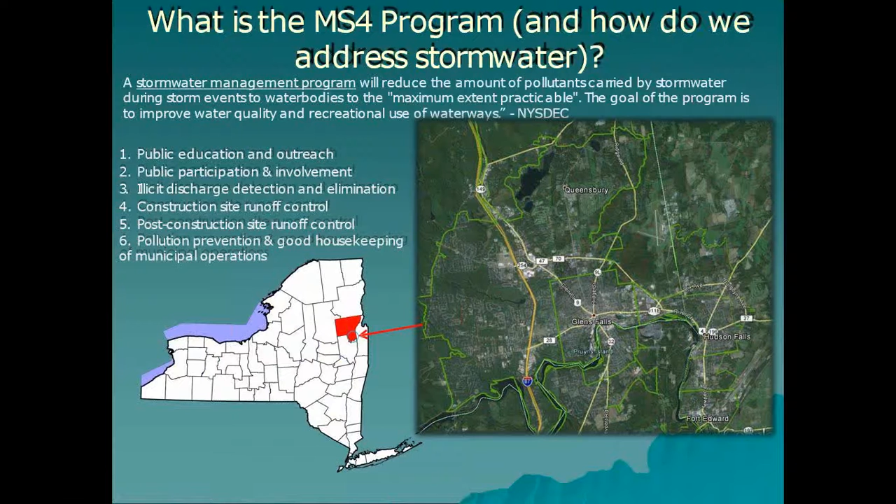We are field-oriented and do a lot of assistance work for municipalities. For example, stormwater conveyance mapping, where we're out there using our GPS units and GIS to develop stormwater drainage maps. Many people don't realize that municipalities don't have these down on paper, or if they do, they aren't digital.

You can see some of the activities we participate in and get the public involved with, such as storm drain markers. That's the image of the 5 people in the top right—a local consulting firm that took their lunchtime and went out to do storm drain marking.

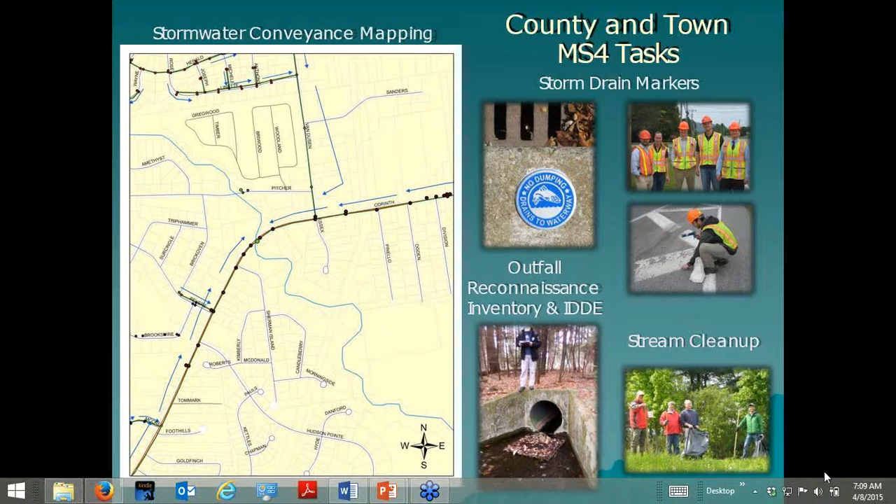We do outfall reconnaissance inventory and illicit discharge detection. If we find something, we pass that along to the agency responsible, either the town of Queensbury Planning Department or the Warren County Department of Public Works, and they deal with things quite differently. And stream cleanups, which most communities participate in—it's a great way of getting the public involved.

This is some of the sampling we do. Here's an example from the town of Queensbury, where we work with their planning department many hours out of the week. The data we collect for the community is available for public viewing on the town of Queensbury's website. They have a GIS coordinator who's fantastic, and we provide the data sheets and locations from our GPS, which they sync up on their real-time server. People can go in there, find a drop inlet or an outfall, click on it, and see what has been sampled.

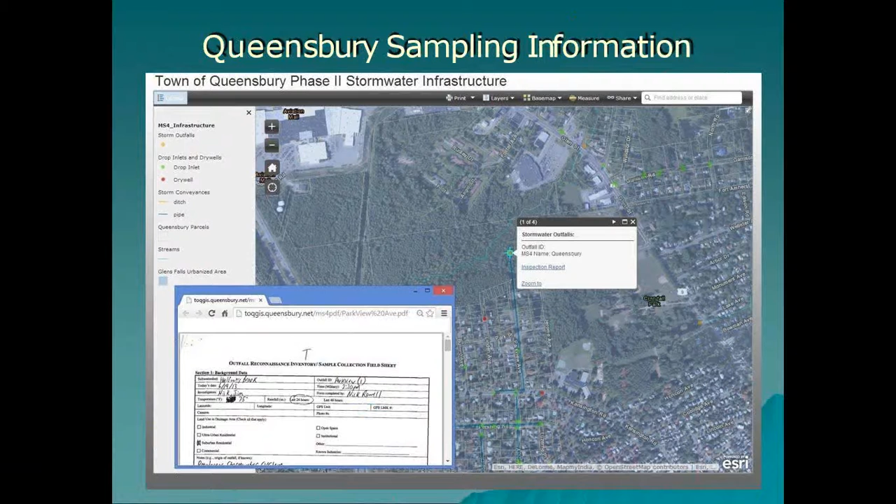So this has been a very valuable tool in getting information to the public, as well as educating the authorities in Queensbury.

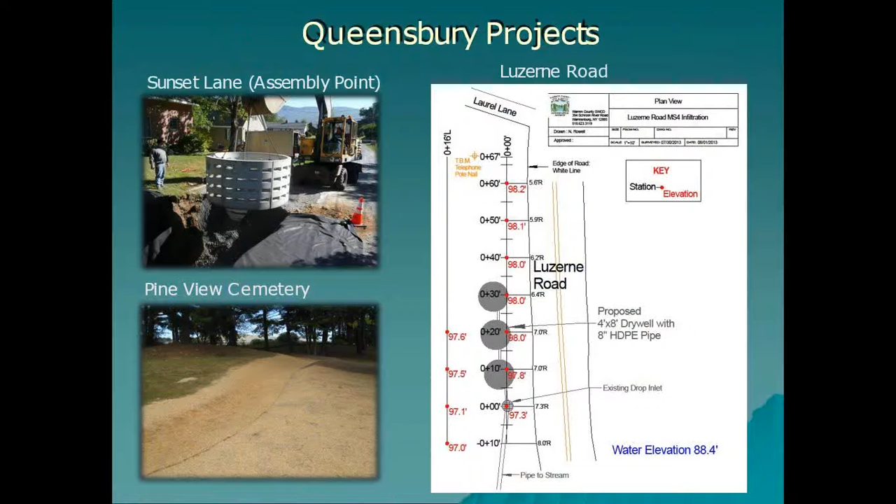Some of the projects the communities work on: in the town of Queensbury, Sunset Lane is a developed area along Lake George, one of our surface water drinking water lakes. Lake George is recognized across the country as one of the best lakes to have in your area, and that comes with a lot of responsibility. It's a drinking water surface, and a couple of communities draw right out of there, so it's important that we assist them in maintaining high levels of water quality.

Infiltration systems, conveyances, vegetation—those are all things we look at to try to disconnect stormwater where possible. Many of our soils are hydrologic soil group A or B, so infiltration is completely plausible. We're also looking at the town of Queensbury's Glen Lake watershed, disconnecting stormwater, getting it into the ground, and treating it with vegetative treatments.

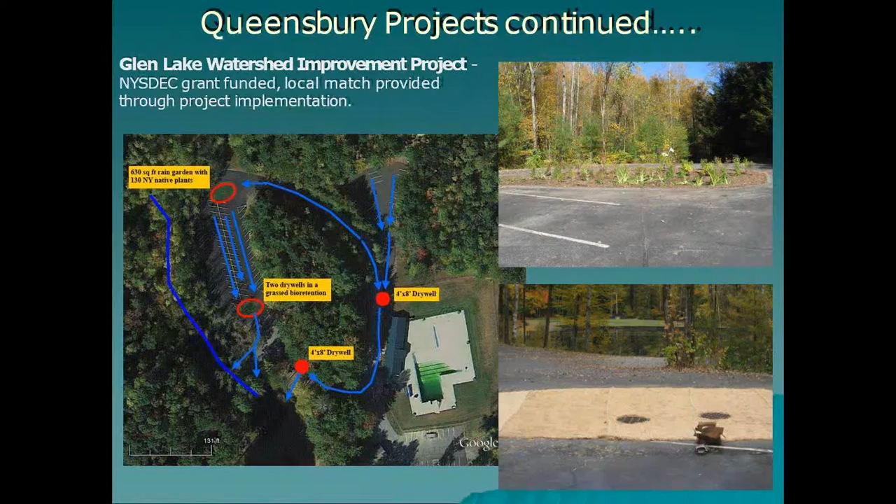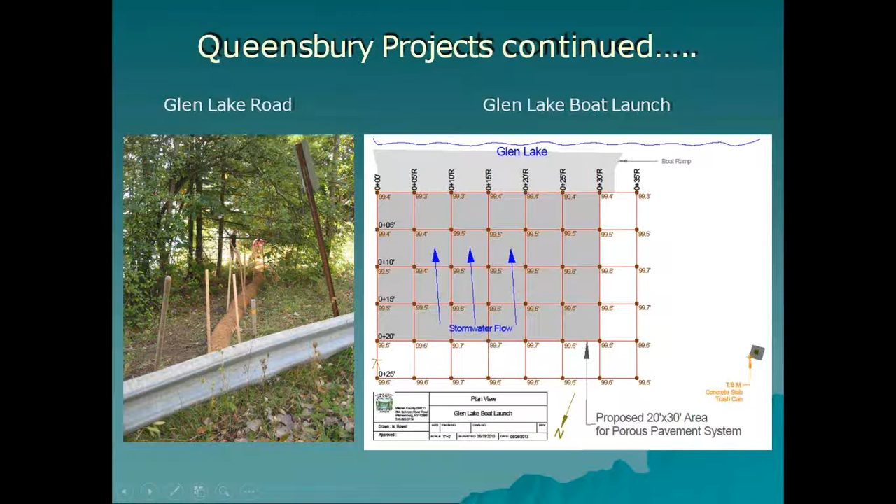This is one of the things we were able to do around Glen Lake. This is a public boat launch on Glen Lake, used any morning you go by there—the parking lot is full of kayakers, canoeists, or car-top boats. We have problems with water coming down off of Glen Lake Road in the background. The town has a dry well up there to infiltrate what it can, but water would still find its way around that, come down across this material, which is item 4 stone dust, and either settle there or continue off-screen and into the lake.

We had some dollars from a New York State Department of Environmental Conservation grant to do some porous pavers there, and we gave it a test run two years ago—I'd say it was 95% successful.

We had one minor issue. We remedied that and then offered up some more money to do the rest of the parking lot. The town was thrilled. The people are excited because in an MS4 community, it's not just water quality, it's also water quantity.

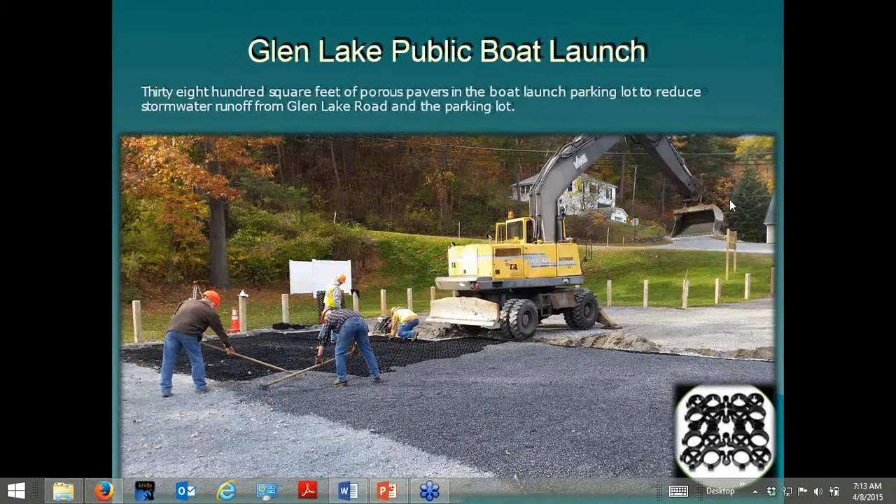So if we can get the water off of the parking lot, get it moving away, and separate it from any potential pet waste and bacteria, that's a good thing for us. Warren County Department of Public Works has bought into this as well. It helps when you have funds available that they can utilize for supplies and materials to do projects, simple projects such as getting out there doing some infiltration systems for water quantity control.

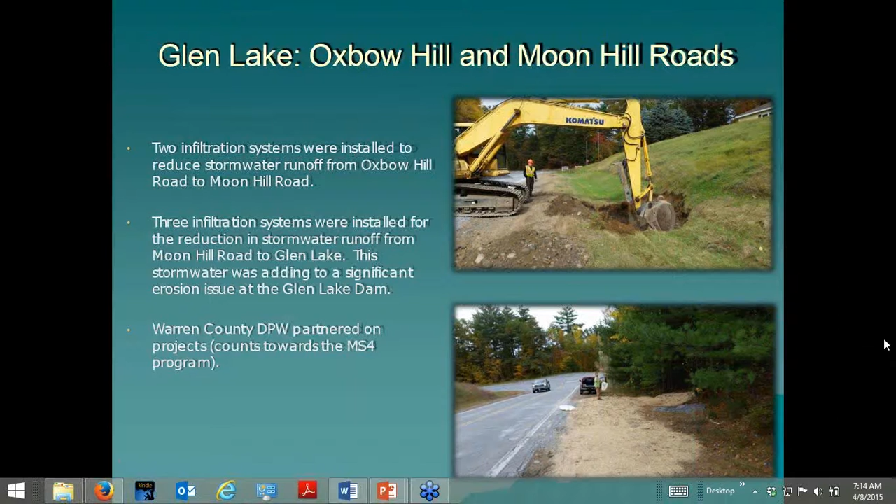This isn't a huge area for non-point source impacts, but it drains down to the lower road you can see in the second image, and it was having an impact on private properties. So disconnecting some of that water volume, treating it, getting it into the ground, and also we're out there with our hydroseeder hand seeding and mulching, getting it out there. So we have a good partnership built up with the DPW and the local town.

Our hydroseeding and power mulching program, if you are getting into urban, suburban stormwater, this is one thing I would strongly encourage you to do. It's very visible and highly effective. You can get rid of basically 90% of the problems with erosion through this type of program.

We have our own hydroseeder and power mulcher, and if we have a grant we are happy to provide the service free of charge to the communities, and that is almost 100% of the time. It has to be water quality improvement related.

As you can see, we have a variety of areas here that we're doing. We have to use, in most of our county, zero phosphorus fertilizers, and the fact is we really don't need a lot of phosphorus, and we use straw rather than hay.

We're very concerned about weed seed in the hay, and even then we try to use hydroseeding as much as possible because we do not live in an agricultural county, and a bale of straw for us is about $11. So hydroseeding is much more effective, cost-effective, and efficient.

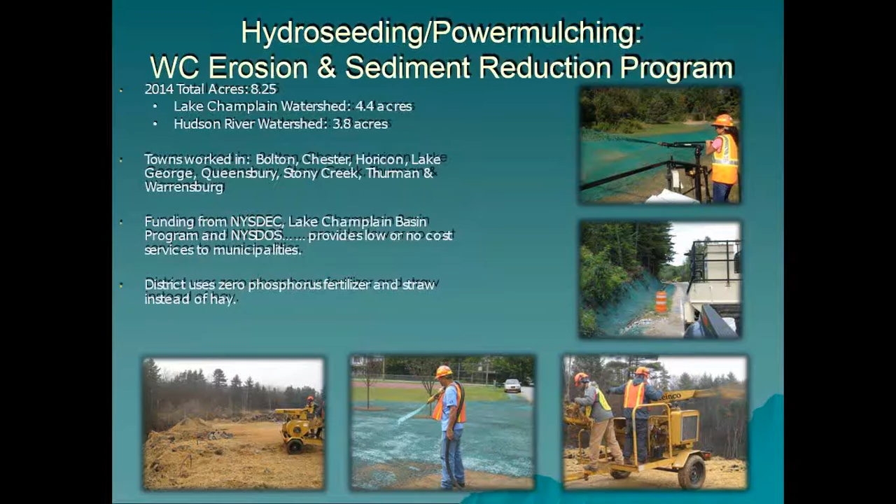And the last thing I'll say is dealing with our communities, we're getting involved in hazard mitigation. I'm also the hazard mitigation coordinator for the county. These are images of some of the problems that we've had.

The one that usually gets the most comment is the top left, where there's a pickup truck. That's actually our office truck, a GMC 1500 series. You can see that is on a road in my town, and the Hudson River is just on the other side of that, and the ice jam comes up and over. That was two years ago. They have to bring in heavy equipment and cut the road open every few years.

But we have our minor landslides. The bottom middle picture is actually a lake that came up during last year's spring snowmelt and rainfall event, and it's level with the parking lot and almost getting to the porta-johns. So we want to try to correct those things.

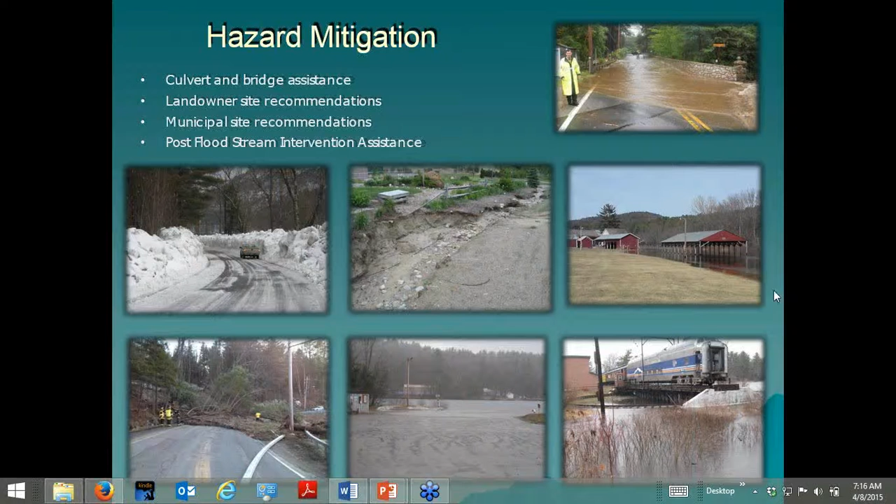So if we can assist the communities with their urban, suburban, or rural issues, we will. And we started in on the stormwater projects about 20 years ago, and we continue to this day.

So if anybody has any questions, I'll be happy to take them.

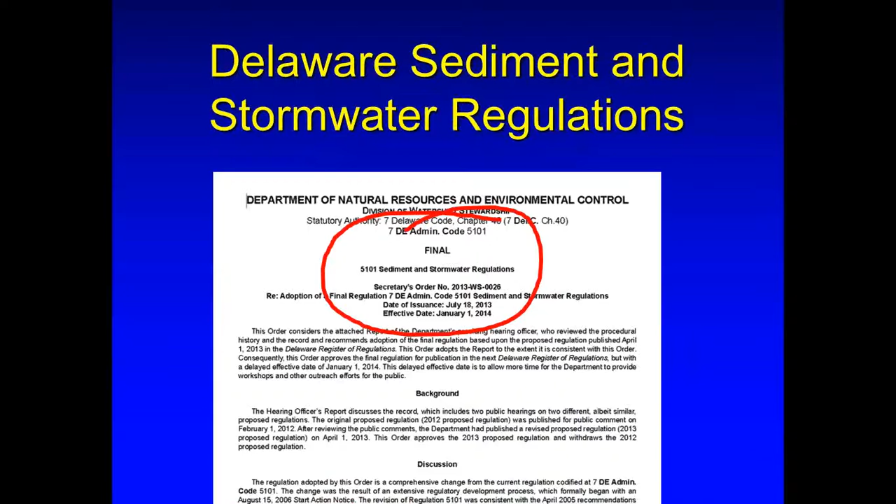So some of the changes to our regulations: we went from a peak-based to a volume-based management. Instead of looking at stormwater on a site level, we went to watershed level management. We did separate our regulatory language from our technical requirements, and we streamlined the plan review and approval process.

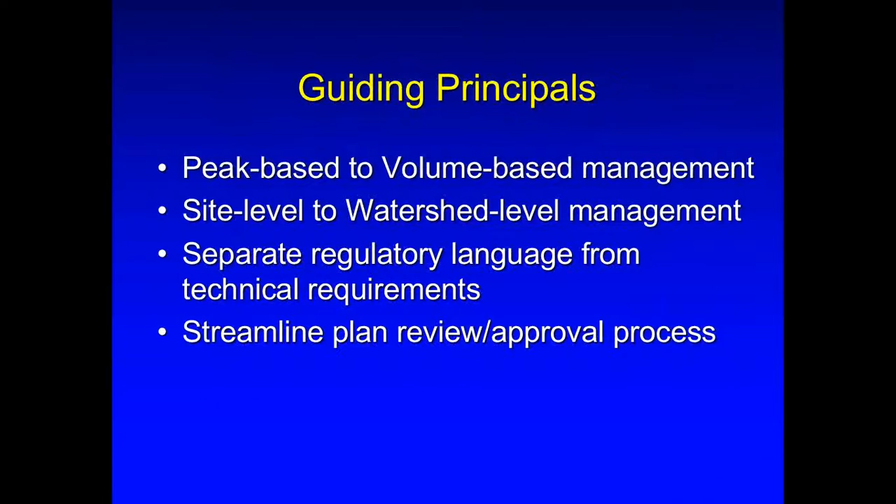So the revised regulations have been written to set the requirements of what you have to do, and the technical document provided guidance on how to achieve the goals of the regulation.

So the technical document combined all of the information that supports the regulations, such as background information, procedures, checklists, standards and specifications, and example projects.

The regulations, as well as the technical document, went through a public review process. So to update the technical document, all changes must be public noticed in our newspaper. You'll see here the technical document, this is just a snapshot of our website, we have a series of PDF links. We don't really have any printed version of the technical document because it'd be too lengthy to print. It's about 2,000 pages.

So the Erosion and Sediment Control Handbook manual, we've revised that. All our E&S practices should be designed in accordance with this 2013 Delaware Standards and Specifications for Erosion and Sediment Control. We really just call it the E&S Handbook. You can see what we've rescinded, and you can see that we revised a lot of E&S control practices, and there's a whole listing there.

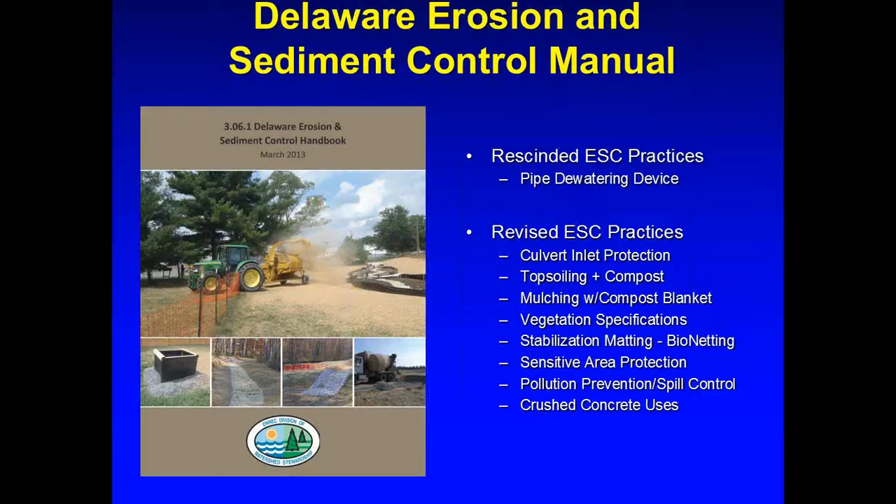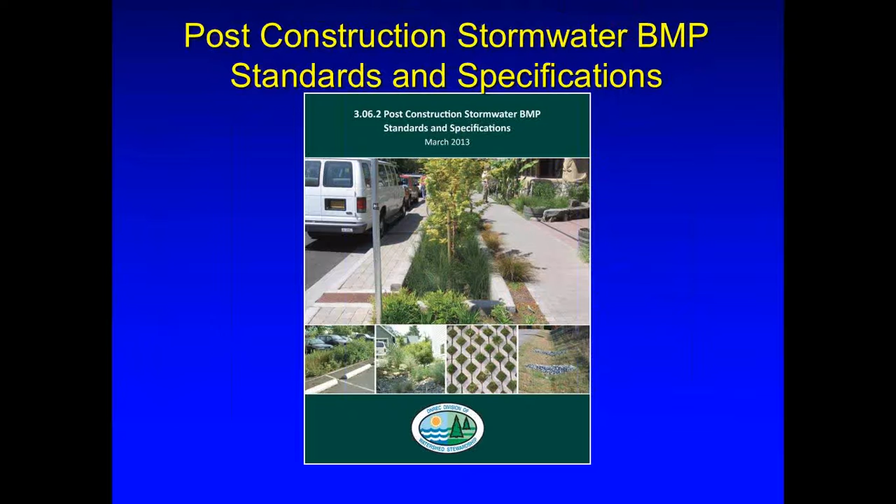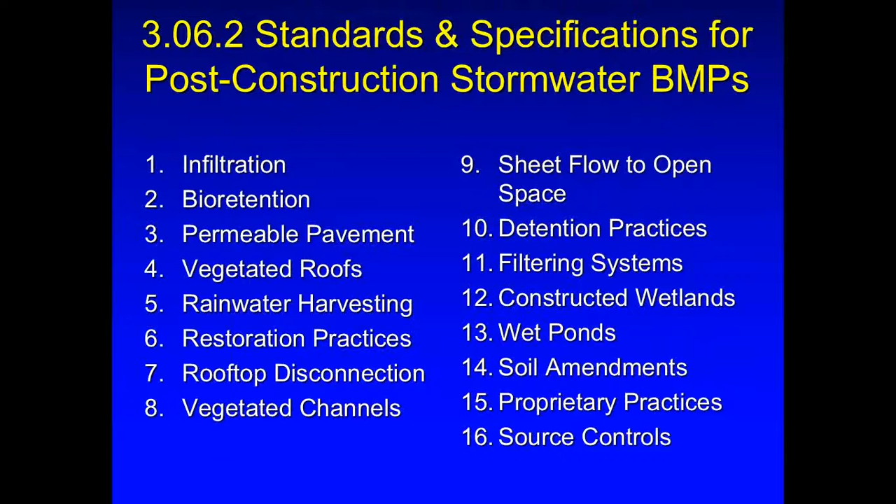Post-construction stormwater BMP standards and specifications is new, and it covers all the BMPs that are available for use. On this next slide, I show the permanent stormwater BMPs that are offered. Next slide.

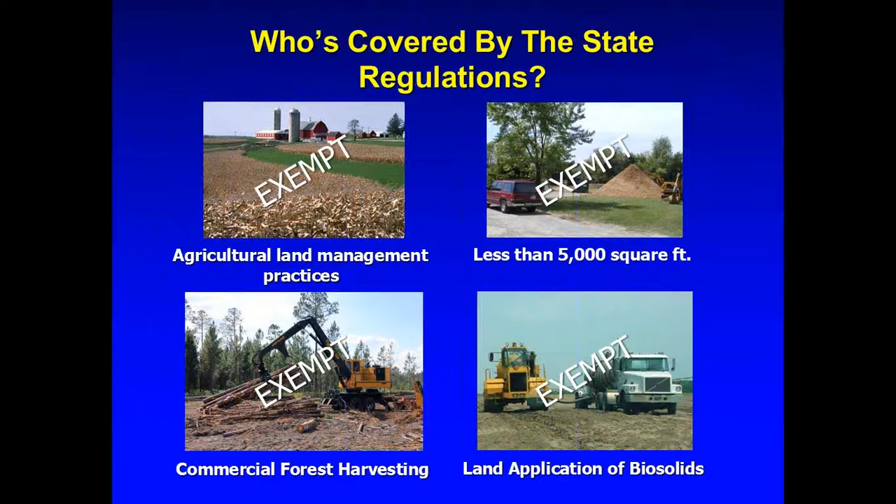So who is covered by the regulations? Well, in Delaware, any land disturbing activities over 5,000 square feet are covered by our regulations. There are some exemptions: agricultural land management practices such as tilling, land disturbance activities less than 5,000 square feet, commercial forest harvesting, and land application of biosolids. Again, the regulations pertain to all land disturbing activities over 5,000 square feet. And by the way, the Walmart regional distribution centers are not exempt.

The owner and developer obviously needs coverage, as well as home builders, for the construction general permit. So to gain construction general permit coverage, you must comply with our regulations. You must have an approved sediment and stormwater plan, and you must have a Notice of Intent, or NOI, for stormwater discharges associated with construction activities.

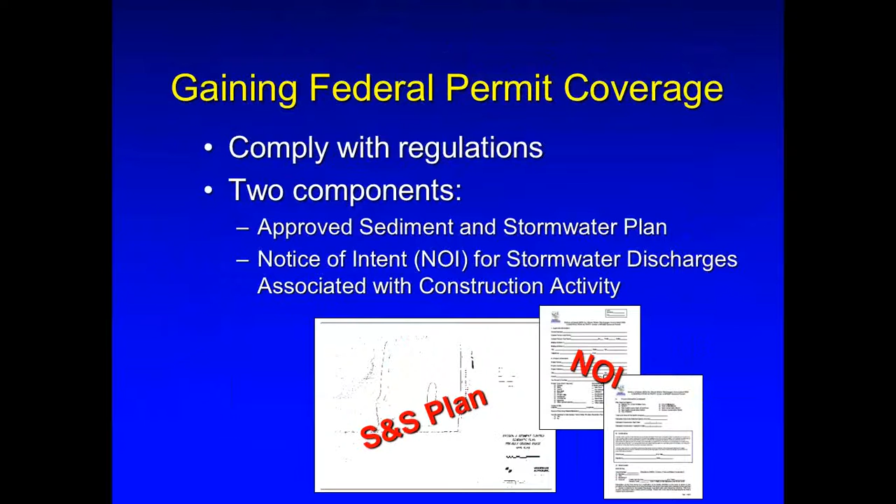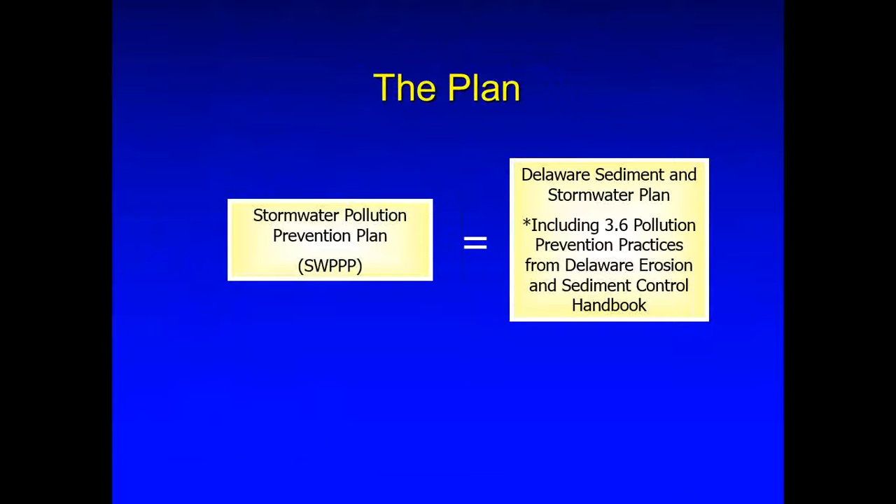In Delaware, the Stormwater Pollution Prevention Plan, commonly known as the SWPPP, is not a standalone document like it is in other states, but it's part of our approved sediment and stormwater plan. So the plan itself contains our pollution prevention specs, and that is our SWPPP in Delaware.

The DNREC Sediment and Stormwater Program implements all aspects of the law and regulations on state and federal project sites. And through our law and regulations, we have the ability to delegate program elements to conservation districts, municipalities, and other state agencies. So local implementation of our program for privately owned projects is carried out by these local agencies, known as delegated agencies.

In addition to implementing the program for projects on state and federal sites, we also provide technical guidance and oversight of program implementation by the delegated agencies. We provide education and training relative to the sediment and stormwater program. We maintain all current information regarding implementation of our program on our website, and we also keep a monthly listserv to distribute emerging information and training dates to those that subscribe.

An approved plan is required for all land disturbance over 5,000 square feet. The plan is good for 3 years. An owner or developer could get an extension of their plan. Any revision would require approval, and the plan must be on site at all times.

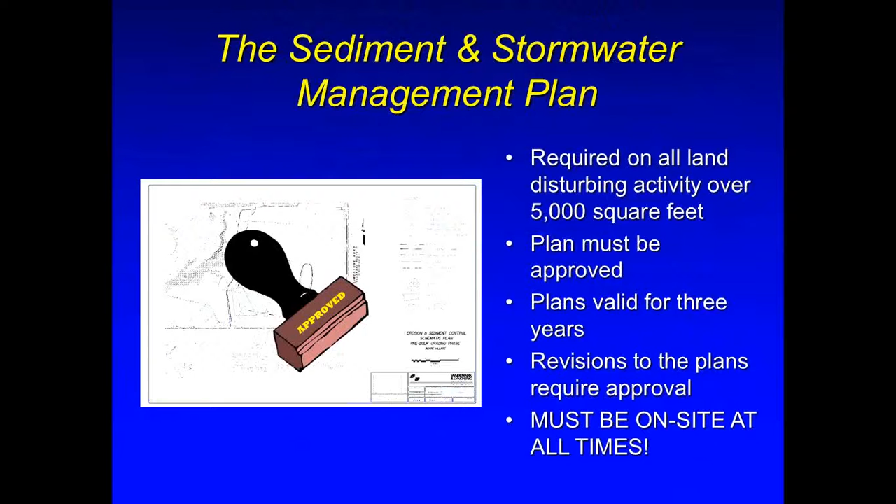Through our regulations, we do have the ability to develop criteria for cases when a standardized sediment and stormwater management plan may satisfy the requirements in place of the detailed plan. So the project needs to meet the standard plan applicable criteria for the project type, and that project has the option to comply with the conditions of the standard plan in lieu of developing a detailed sediment and stormwater plan. Here's just a listing of the project types we have developed thus far.

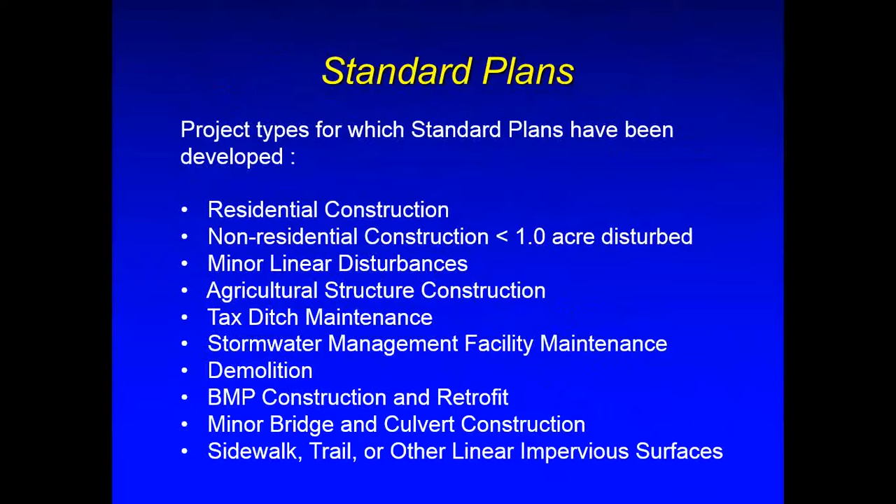We do offer a 2-day designer training to assist individuals who will be preparing detailed plans and engineering computations.

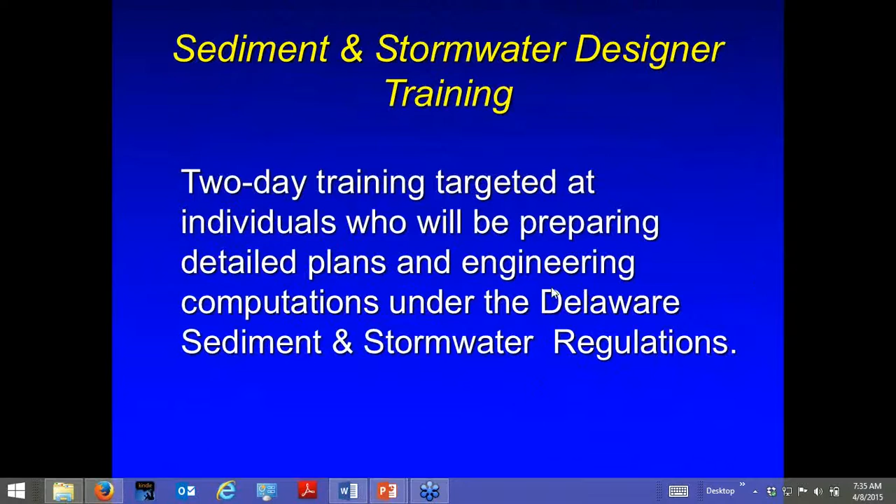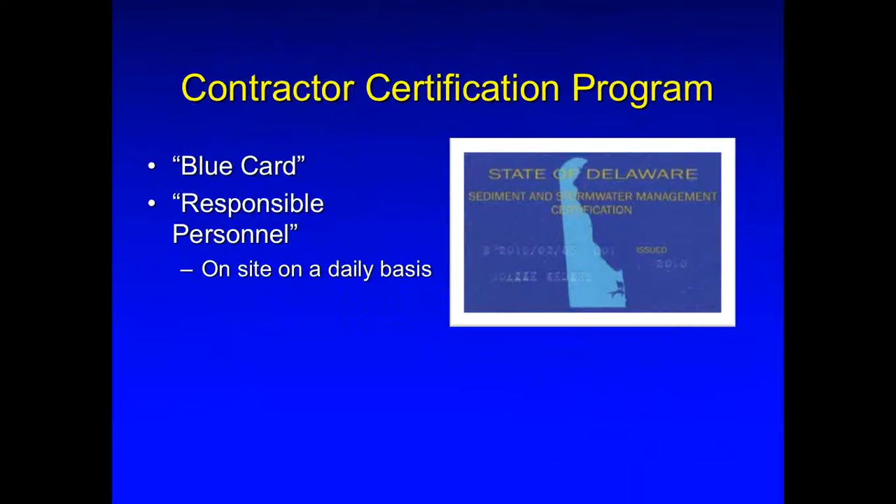We also offer the contractor certification course. We know this as the Blue Card class. It's a 5-hour class that provides an overview of our sediment and stormwater program, the regulations, and the required E&S measures in our state. Our regulations require that every job site have at least one person on site on a daily basis who has taken this course. A lot of the participants are either contractors or developers from out of state, so it's really good training for them.

The next course we offer is the Certified Construction Reviewer, also known as the CCR, which we call the Gold Card. It's like a private inspector, hired by the developer when required by the review agency. Basically, they're the eyes and ears out there for the delegated agency, and for our state and federal projects we rely on their reports. So that's just another tool that we have. It's a 2.5-day training; the half day is a mandatory field trip. They take an exam and get a certification, good for 5 years, and then they have the opportunity to come to a 1-day class to recertify for another 5 years.

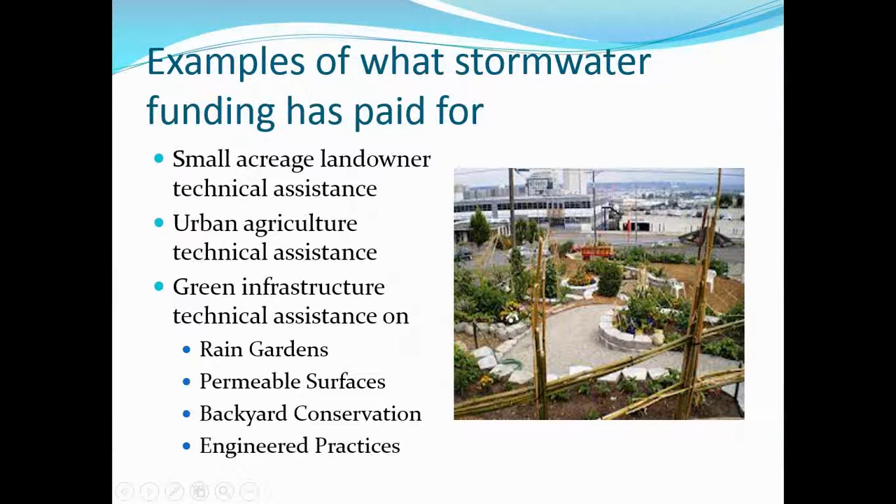They've done massive work at their county fairgrounds, about 6 acres. They've got a massive stormwater pond you'll see there, and lots and lots of permeable pavement that they designed and helped install for the county fair. It's a huge operation there.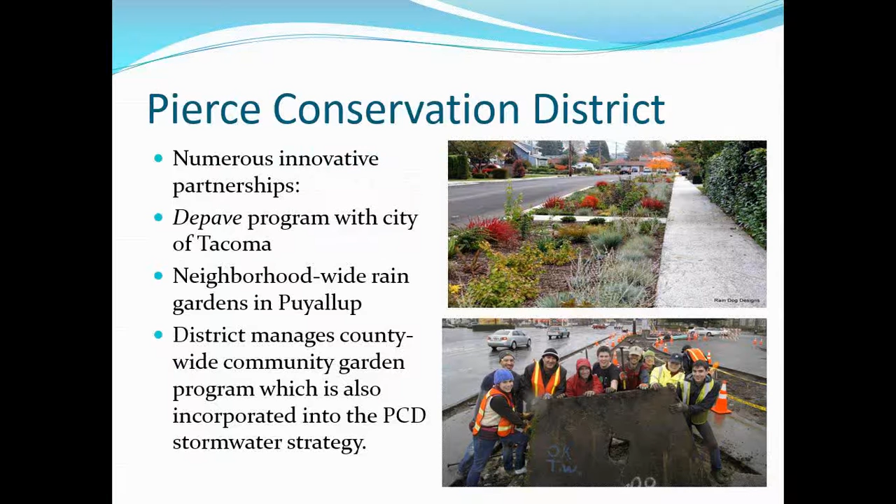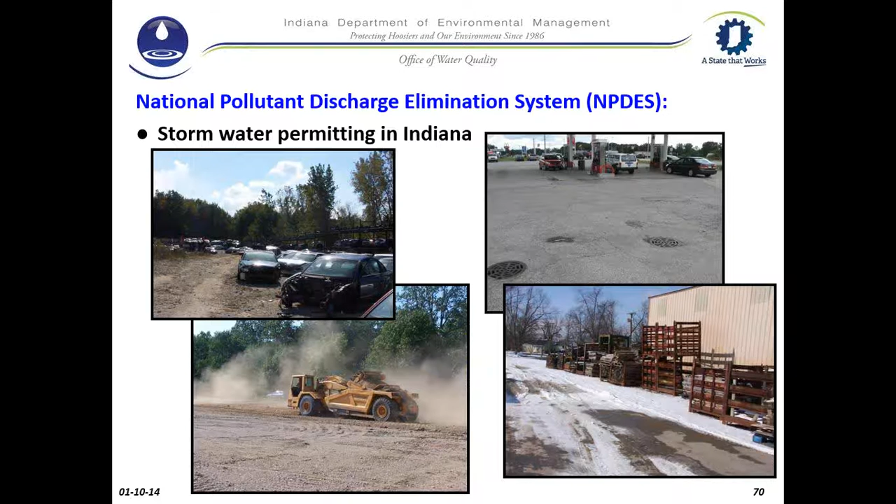Once again, we're a delegated state through the U.S. Environmental Protection Agency—we administer the Clean Water Act. Within our group, we administer 3 stormwater programs. All of our stormwater programs are currently administered through Indiana administrative code, but I'm going to discuss some changes we'll be seeing in the next year or two.

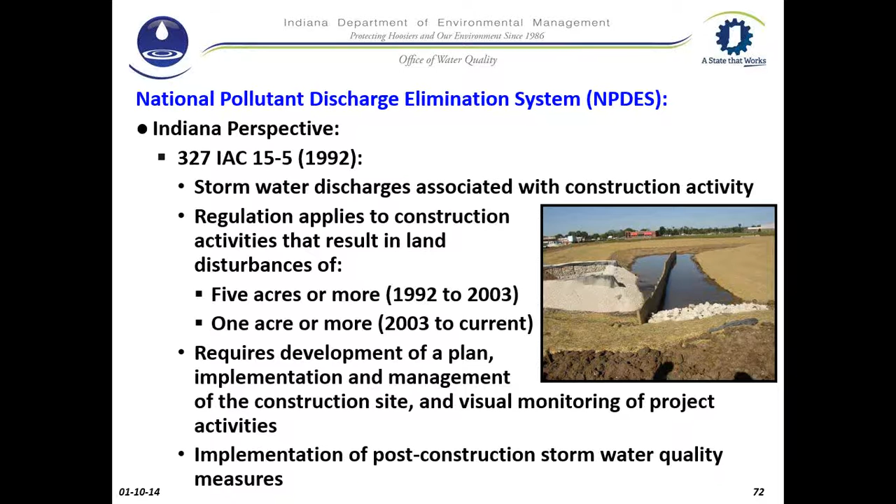One of our primary regulations is stormwater discharges associated with construction activity. When the program first started in 1992, we regulated 5 acres or more of land disturbance, and beginning in 2003 under the Phase 2 program, we began regulating land disturbances of 1 acre or more. Our regulation requires development of a construction plan and a stormwater pollution prevention plan for each project. We require implementation and management of the construction site and visual monitoring of project activities. As part of the construction component, we also require the plan to include provisions for post-construction stormwater quality measures. The objective is that during development of the plan, the developer and engineers can identify what the post-construction impacts will be.

The second program we administer, which I won't spend a lot of time on today, is our industrial stormwater program, administered within the same section. This regulates industrial operations exposed to rainfall events. An industrial operator is required to develop a plan and manage on-site operations, and for this program we do require annual sampling of stormwater runoff discharges.

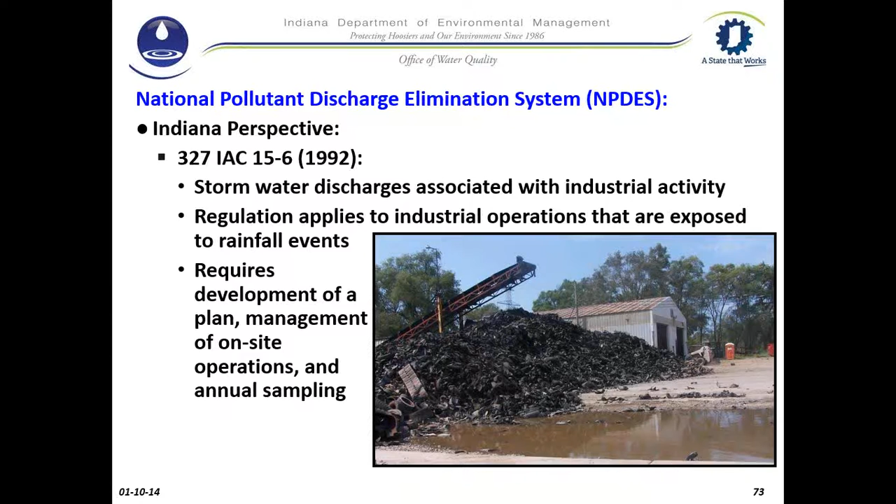The third program we're involved with began in 2003 as part of Phase 2. We have 186 municipal separate storm sewer system entities. These entities are required to develop local stormwater programs, with components ranging from education to illicit discharge, post-construction, and construction site runoff.

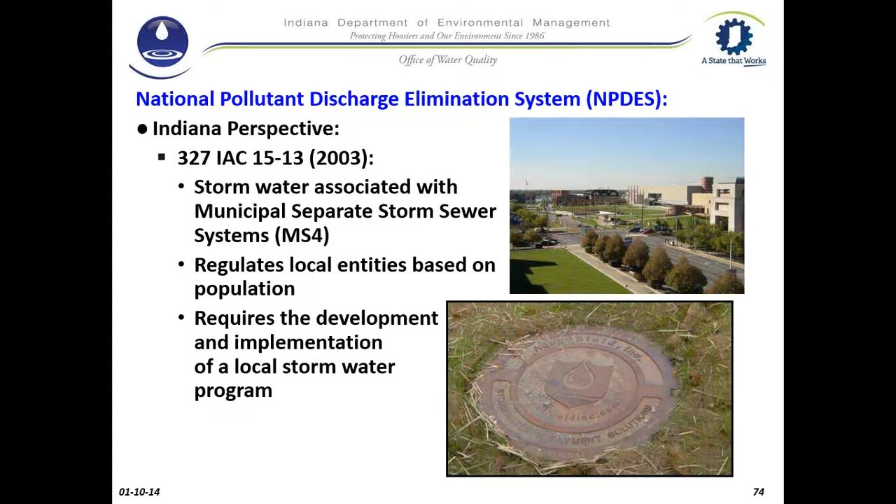Next. So I'd like to spend a little time talking about the role of soil and water conservation districts in Indiana, and talk a little bit about the progression we've seen since 1992.

SWC's role, the highest level of participation would be with the construction site runoff program, which is more in line with what the objectives and mission of soil and water districts are in Indiana.

They're also involved with MS4 programs, and we'll talk a little about the transition that occurred in 2003, 2005, when the agency designated MS4s to become permittees.

And then industrial stormwater, SWCs have very little role in that program, so we probably won't be talking much more about the stormwater industrial program.

Under the Phase 1 regulations in 1992, the primary responsibility for implementation was with the Indiana Department of Environmental Management, which pretty much did administrative process and enforcement of the regulations. During that time period, beginning in about 1993, there was a memorandum of agreement between IDEM and local soil and water districts and the DNR Division of Soil Conservation. At that time, I was part of the Division of Soil Conservation, and we worked very closely with soil and water districts.

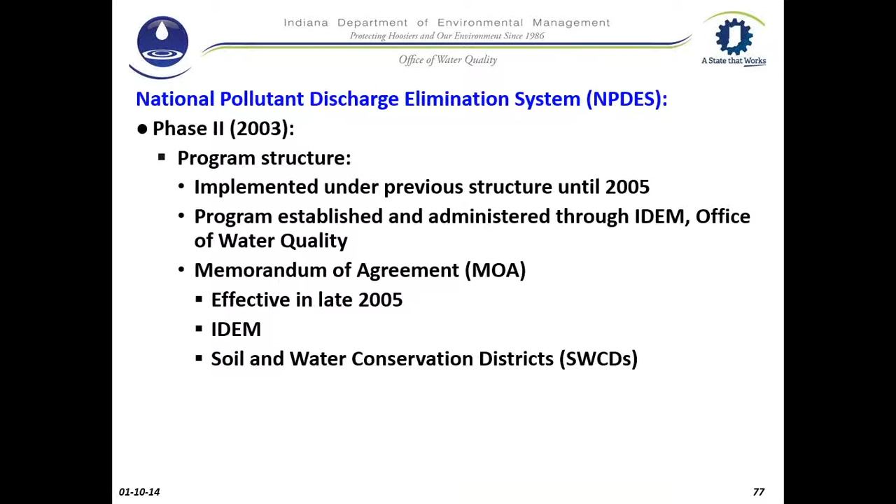So the new structure is a lot more complicated than we had in the past. The MOA right now allows soil and water districts to actually choose their level of participation in the stormwater program.

Part of this has to do with MS4s, and we'll talk a little more about how MS4s play into involvement of soil and water districts. But for the 3 levels of participation, our state regulation requires all construction and stormwater plans to be submitted to the soil and water districts where there's not an MS4 community.

So the SWC can choose to have an administrative role, which basically means they receive the plans and then contact one of the Indiana Department of Environmental Management resource staff, regional stormwater specialists, who would come in and review the plans for those proposed projects in those communities or SWCs.

An SWC can also choose to do the administrative role as well as the technical plan review. A soil and water district having technical staff could actually go in and review those plans in accordance with the state regulation to make sure the plans meet those requirements of our rule.

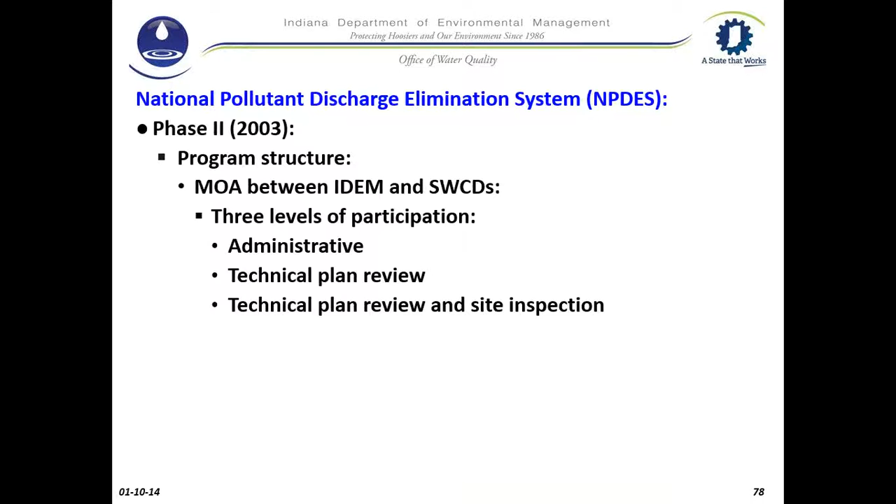Next. In 2003, I also mentioned there was an establishment of the MS4s. At this point in time, in 2003, we made a very strong effort working with our state conservation district association to get SWCs more involved with MS4s. We did quite a few outreach events, went to soil and water district board meetings trying to promote SWC's role with MS4s.

The result of that is we've had quite a few SWCs that either contracted or established MOAs with MS4s across the state. They do everything from administering education programs for the MS4, and some of them actually participate in plan review and site inspection within the MS4. The roles vary by SWC.

Some SWCs are not involved at all with the MS4 program. We have at least one SWC that has served as the MS4 coordinator for a partnership of MS4s in the northern part of the state, and that's probably one of the more active SWCs we've had participating with MS4s. Next.

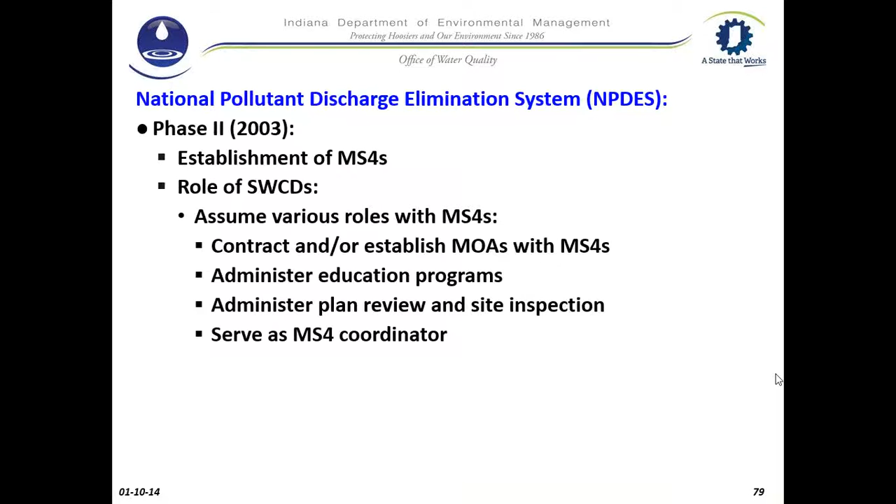So I mentioned earlier that we currently administer our stormwater regulations by administrative rule. The administrative rule process takes quite a bit of time when we want to update those. There are only a few states in the country that actually administer their NPDES program this way for stormwater.

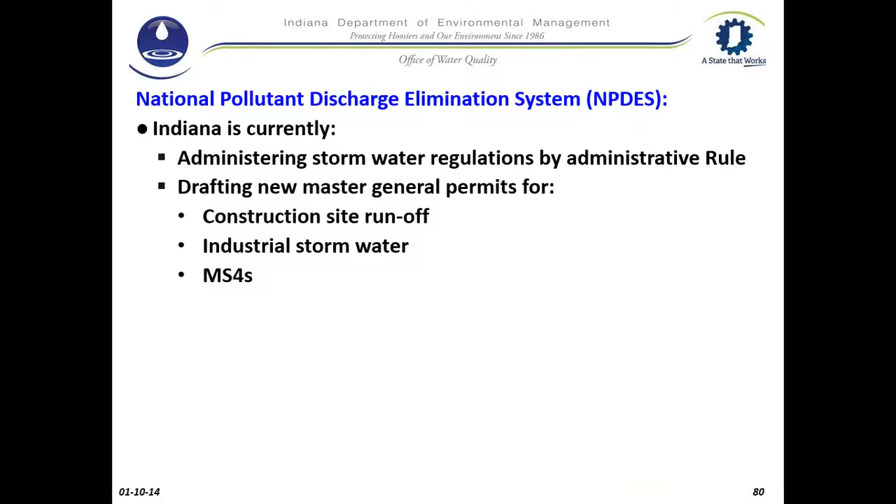We're in the process, at the request of EPA, to go to drafting new master general permits for all our stormwater programs. We've been involved in that process for probably about the last year and a half. Hopefully by the end of this year, we will be submitting our construction site runoff, our industrial stormwater, and our MS4 permits to EPA for approval. At that point, we will make a switch over to administer the programs that way.

One of the unique things that we have done in Indiana is I'm the section chief for the wetlands and stormwater programs, and they combined our programs probably in about 2006. One of the reasons we did this is the Wetlands Section 401 Water Quality Certification Program and our Isolated Wetlands Program.

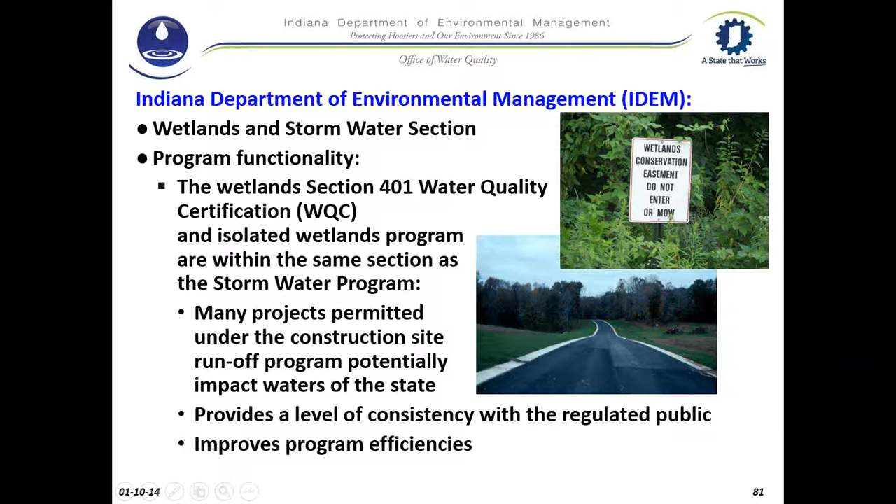Those staff actually permit impacts to land resource and water resources, as would, say, a new construction project. So there's a lot of overlap. Oftentimes we'll have a construction project that's going to impact the wetland, therefore the staff is in the same section. They work collectively together to administer the permits. This provides a level of consistency with the regulated public, and the staff works very close together. We have about 8 staff for each program, about 8 for wetlands and 8 for stormwater. Overall, this approach has improved program efficiencies across the program.

Just an overview of staff: we have myself, administrative staff, a stormwater permits coordinator that's responsible for making sure the flow of permits and applications that come through the door are processed in a timely manner. We have one person dedicated as an MS4 coordinator, and then we have 6 total regional stormwater specialists. The stormwater specialists basically do a lot of the field work - they not only do construction site runoff, they do industrial stormwater, and they also participate in various aspects of the MS4 permitting process. And then there's 8 total wetlands project managers that administer the wetlands program.

So program priorities, basically permitting, complaint responsiveness. We do quite a bit of training and outreach. And then we do have development of resource materials, whether they be brochures, permitting guidance documents, and then we do have an Indiana Stormwater Quality Manual, which we are in the early stages of looking at where we're going to make updates this next couple of years.

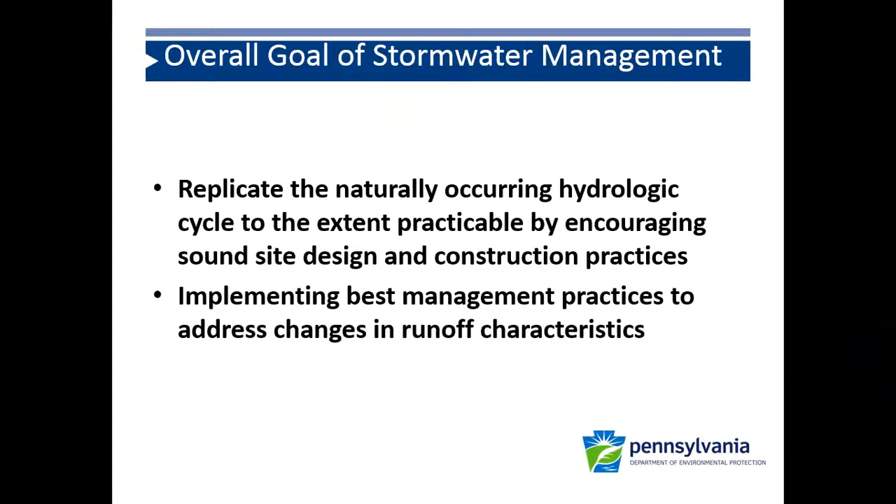In Pennsylvania, we actually have some regulatory authority to do this. Our main regulatory authority for stormwater management is 25 Pennsylvania Code Chapter 102, covering erosion and sedimentation control and stormwater management. This section of our regulation has been around since 1972 and has evolved from a strictly state erosion control program to an integrated NPDES erosion control and stormwater management program and authority.

We are a delegated state from EPA for the NPDES program, so we have largely the construction and post-construction sections, and then our MS4 program, along with industrial stormwater, which I'll just mention and not talk much about today. Our construction and post-construction program deals mostly with new and redevelopment, while the MS4 program deals a lot with retrofitting in Pennsylvania's urban areas. Other states have shown lots of great examples of how that's done - removal of impervious areas, replacement with pervious surfaces, retrofitting of long-installed urban BMPs, and those sorts of things. So that's kind of how the program is structured in Pennsylvania.

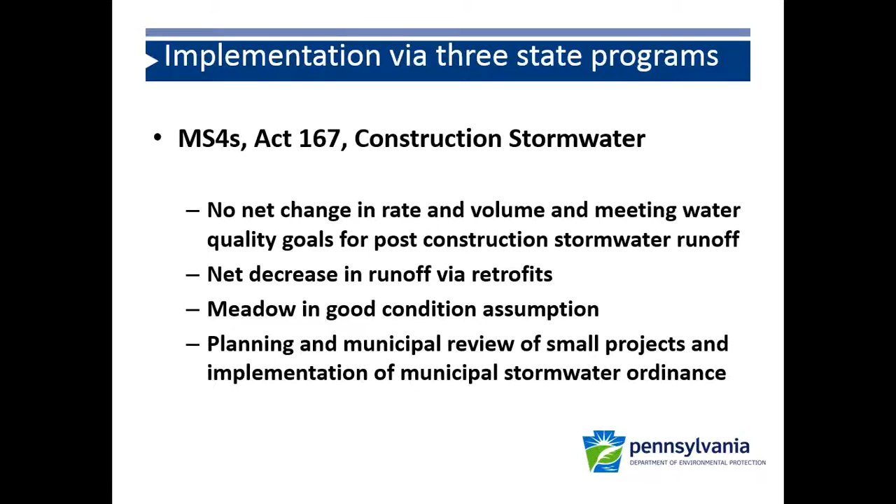In addition, our Act 167 includes planning and municipal review of small projects. Things under Chapter 102 are regulated through the NPDES program for one acre or greater of earth disturbance, and requires erosion and sedimentation control plans for things down to 5,000 square feet. Or if they're in one of our more special protection or higher quality watersheds, there is no lower threshold - they must have an erosion and sedimentation control plan regardless of the size of the project. So those three levels all work together.

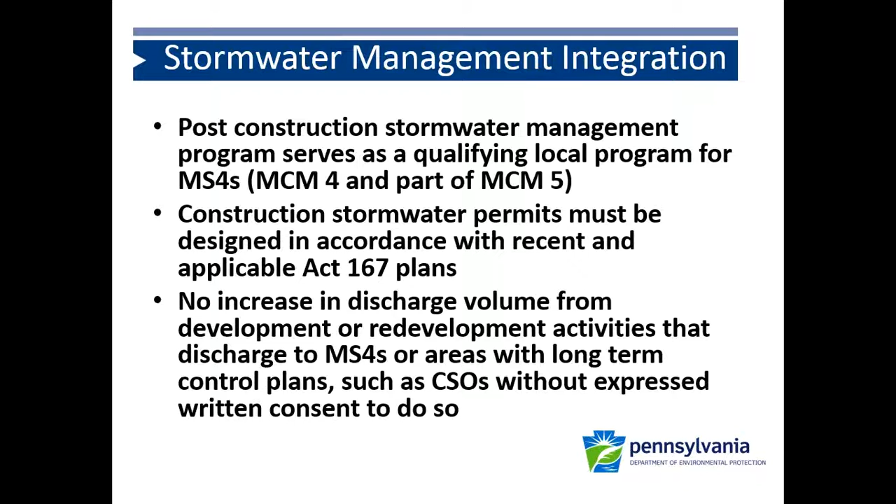We integrate stormwater management through Pennsylvania's construction and post-construction programs to serve as a qualifying local program for our MS4 program. MS4s must have, as part of their minimum control measures or MCMs, both a construction and a post-construction stormwater management program. In Pennsylvania, with one exception—the city of Philadelphia—all our MS4s rely on Pennsylvania's program for construction and post-construction. Our permits must be designed in accordance with our Act 167 local stormwater plans, so that we coordinate between the state level and the local level. In addition, we do not allow any changes in volume from development or redevelopment activities through the construction program in areas such as MS4s or those with CSOs and long-term control plans, so that new development doesn't increase discharges to an MS4 community. So we have a lot of feedback mechanisms to do that.

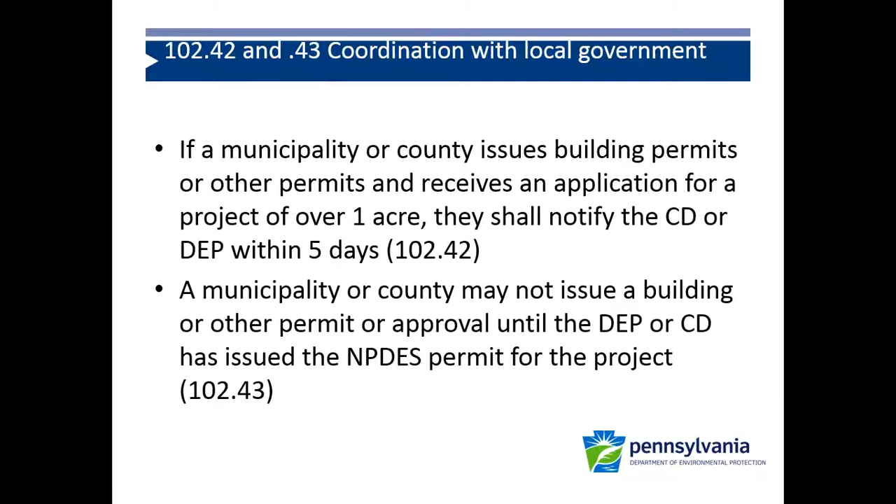In addition, we have sections of our regulations that talk about the roles and responsibilities of local municipalities or counties, specifically as it relates in Pennsylvania to issuing building permits or other approvals. Essentially, it says they may not issue those types of approvals for house construction or other construction until the NPDES permits have been received from the department or the county conservation district for that project.

In Pennsylvania, we largely work with our county conservation districts—we have 66, actually 67, but Philadelphia does not have one. So we work through our 66 county conservation districts for this regulatory program. We've heard different states describe different degrees of regulation through their conservation districts. In Pennsylvania, they can choose, similar to Indiana, a level of how involved they would like to be, all the way up to being delegated for compliance and enforcement—actually doing the documentation, as well as participating in conferences to work out fines and payments.

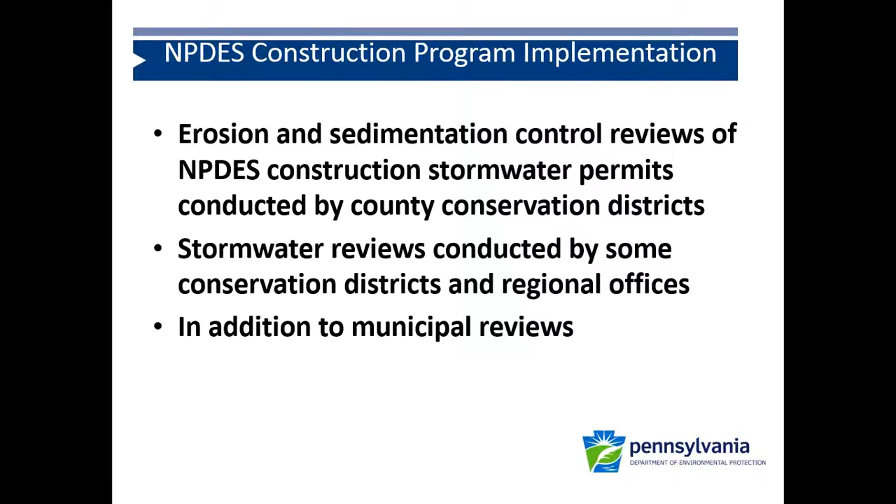Stormwater reviews are conducted by some of our conservation districts, and in cases where the conservation district has not chosen that level of delegation, they're done by our regional department offices. All of this is in addition to municipal reviews done through either Act 167, MS4s, or municipal ordinance.

As far as manuals and tools, we have both an erosion and sedimentation control manual as well as a post-construction stormwater management manual in Pennsylvania. Generally, when we develop these manuals, we use a stakeholder and expert group to put them together. They must have public participation in our state because they are technical guidance through our department. So this is not a short process, but it allows for a lot of public comment and improvement of those documents.

We also recognize that manuals are kind of static documents—once printed, time moves on, technologies move on. So we have procedures in place in Pennsylvania that allow new technologies, or new applications of existing technologies, to be reviewed and implemented between manual updates, and used by our regulated community and those that review our plans, including our conservation districts and others. Next slide.

For training, we don't have the kind of academy-type process that Delaware mentioned. We have training, but it's less of a certification process and more about education for our regulated community and those doing plan reviews internally, both in the department and our county conservation districts. In recent years, we've gone to doing a lot of technology-based webinar trainings, which we've found extremely useful, especially being able to record and archive them for later. That's something we've really had success with in Pennsylvania.